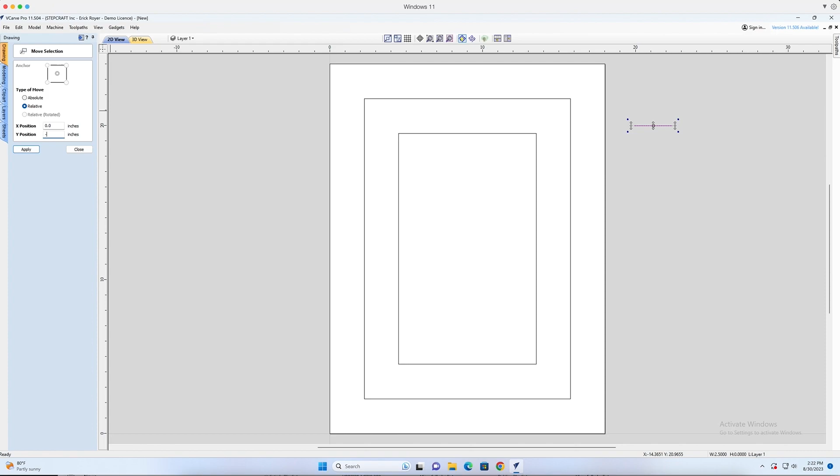I'm going to come here to Move Selected Objects and make sure I'm on Relative. And we're going to move the second line down, so negative 0.325, which is the depth of this pocket.

So I'm going to zoom in here. If you're looking at this, this is kind of like the top surface area of the door, and this is the bottom area of the pocket. So it's like you're looking at it from the edge.

We need to know what angle V-bit you're going to be using. In this case, I'm going to be using a 110 degree V-bit. So I want to make sure that these 2 snapping buttons are selected in Vectric. And I'm going to select the line tool, and it'll snap automatically to the edge of this top line. So all I want to do is click the mouse button once, and then I want to come over here to angle. Now I'm using a 110 degree V-bit, which if you divide that in half is 55 degrees.

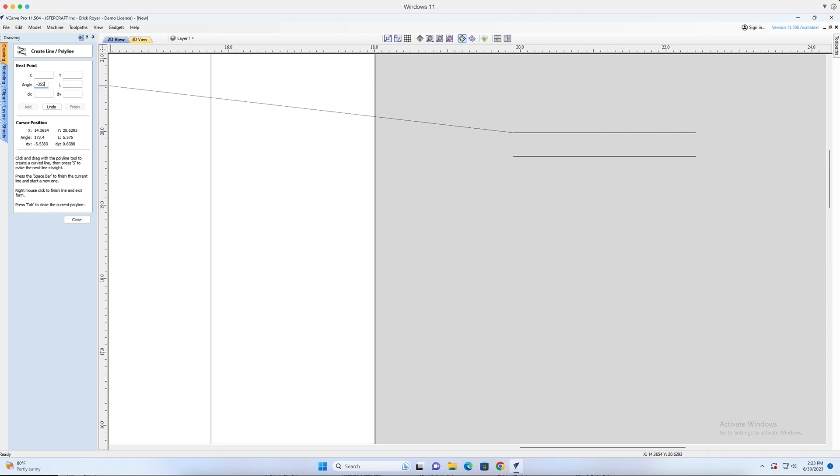Subtract that from 90, and that gives you 35 degrees. Make sure we have a negative sign so the angled line goes in this direction, so we'll do an angle of negative 35 degrees and give it a length of 0.75, then click enter.

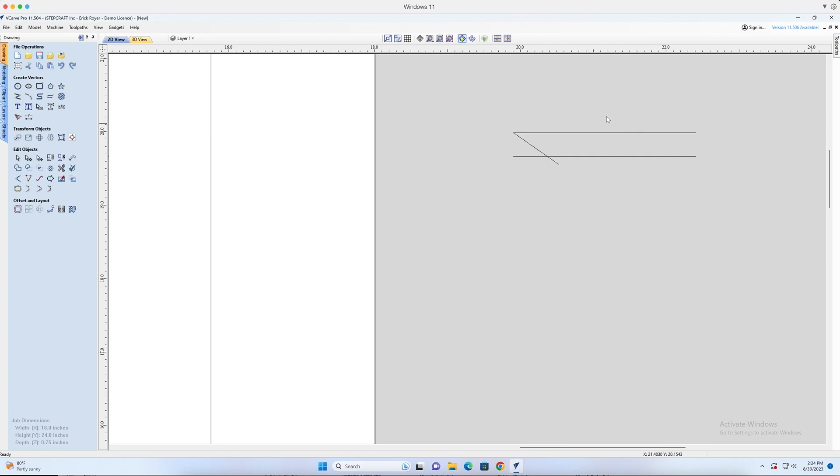Here's my line. I can click close. This represents the profile of the beveled edge on both sides of the raised panel section of the door.

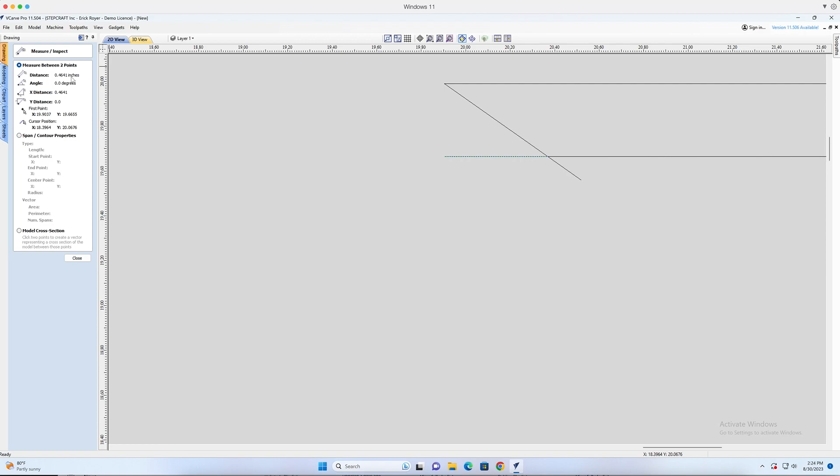But what I need is the dimension, so I'm going to click the dimension tool, the measuring tool. I need the distance from this point on the end of the line to this point on the intersection where the two lines cross, and I get a distance of 0.4641. You'll want to write that down.

I'm going back to the main drawing. We'll select the innermost rectangle and go to offset and layout again, except this time outwards, and we'll change that to the 0.4641 dimension we just measured. Make sure the top and bottom check marks are there, and click offset.

One final vector we need to create: we'll keep everything the same outward, but change this to 0.5 inches and create one more vector. I'll explain what all these are in a few minutes.

Next we select the innermost rectangle and Control C to copy it, then hit the letter N for node editing. You'll see four black squares appear in the corners. We hover over each square and hit C, cutting this rectangle apart into four separate vectors, four separate straight lines.

If I hit escape, I go back to a normal arrow, and you can see each of these is now a separate line. I'll select the bottom line, hold shift, select the top line, and go to Transform Objects, Set Selected Object Size. Make sure the center is selected for anchoring, and make sure link XY is not checked.

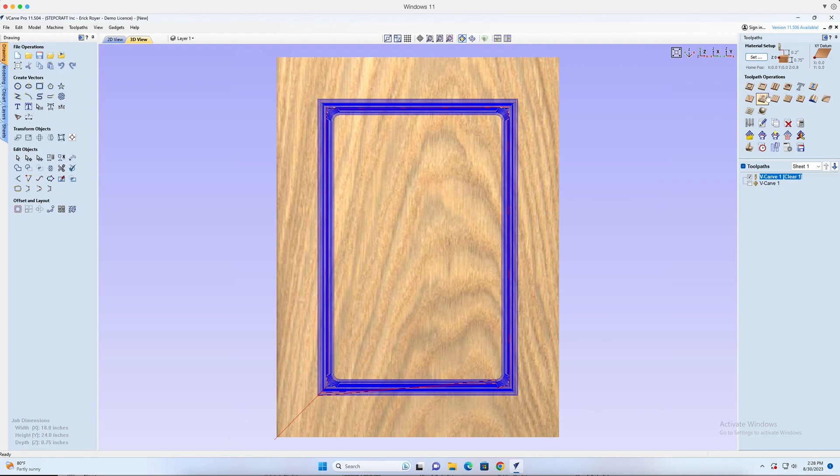So the first toolpath is going to be a pocket. I'm going to go preview that toolpath, and you're going to see it created a pocket down to 0.325 and then 2 steps on either side. Basically what this is doing is removing the bulk of the material so that the V-Carve bit does not have to do as much work.

Then we're going to select the V-Carve and preview that toolpath. Now you can see what happened here. It created a bevel on the inside, but I'm not concerned about that because we're going to create the final one in a minute.

What's more important is it created the bevel on the outside. If you look at the bevel, you get this nice sharp angled corner that goes all the way to a point right here. You can't get that if you're using a ball nose and doing a carving toolpath for MDF raised panel doors, because your bit is round. You'll never get a perfectly sharp corner. The only way to do it in this situation is with a V-bit and using a V-carve toolpath.

All right, so that's the first step. Now the next thing we're going to do is go back to 2D view, and we want to create a profile toolpath. We're going to select the same 110 degree bit that we had for the first one. Our cut depth is going to also be 0.325. We want to cut outside the line, outside the vector.

Now what we need to do is select the 4 lines that are in the middle, so that we extended the length of before. So 1, 2, 3, and then we'll select this one. And we're going to click calculate. It's going to give you a warning, basically just saying you're not using a closed vector, you're doing lines. Just click OK.

Now, looking at this from the top, what we want to see is each of these 4 lines should be right on the edge of this top raised panel rectangle. And it'll look just like this. But these 3 are not on the edge, they're moved in.

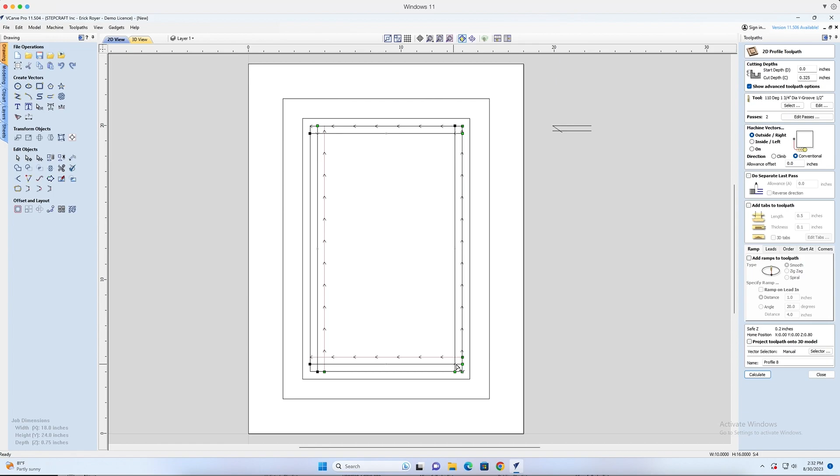Okay, and now we're looking at it and we still have an error, and I'm not sure what we did here. Oh, I think I know. I didn't select the actual vector, I selected the toolpath. So what we're going to do is on this one, we're going to hit P, and the other one was the bottom one. So this line right here, we're going to hit P and then calculate. And now we've got it.

So now all 4 lines are on the edge of that rectangle, okay?

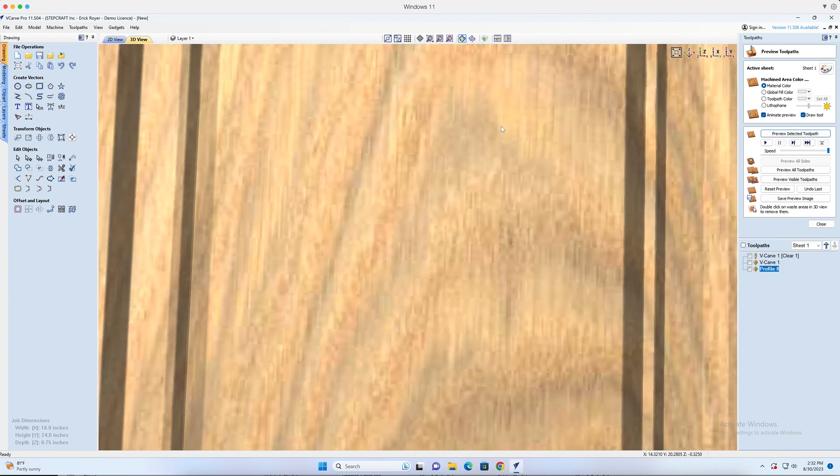So we can preview that toolpath now, and you'll see what it did. It created the bevel all the way around the raised panel, and just like on the outside, we've got a nice sharp angle on the inside here, and that looks good.

Now the only thing we got to deal with is this piece of material in the middle. It looks like a pyramid. That's got to be removed, okay? That's just what was left over from this toolpath and this toolpath, so we're gonna get rid of that.

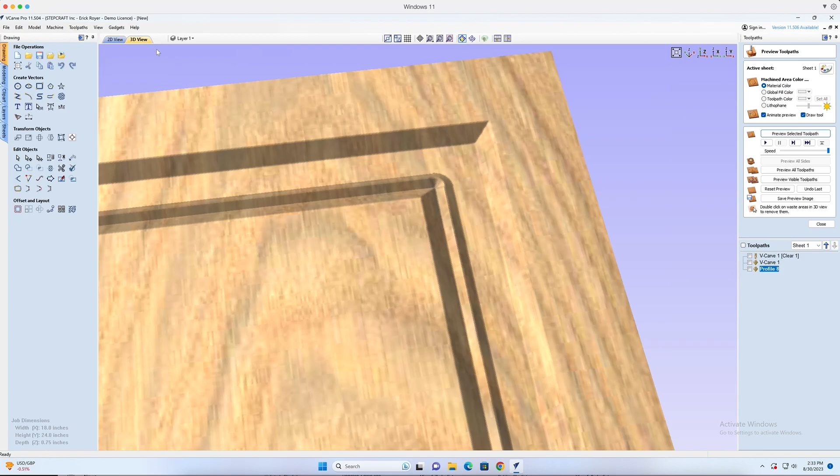The easiest way to do that is to go to a pocket toolpath. We're gonna select a 1/4 inch down cut with a cut depth of 0.325. Again, everything is based on the depth of that pocket.

Now what we need to do is select this vector, which is the one that we moved out from this dimension over here. Hold the shift key and select this one, which is the one we moved a 1/2 inch away from the previous, and we're gonna do pocket toolpath. 0.325, and click calculate.

Now we're just gonna preview that, and you'll notice that entire extra material that was left over disappears. What you're left with is a very nice raised panel door with sharp corners on the inside and the outside, and a nice clean flat bottom on it.

Now, the only other thing you might want to do to this is maybe put some sort of a chamfer or radius around the outside edge. You can do that with a radius tool and a profile bit. For this purpose, let's just do a chamfer. We'll use the 110-degree V-bit.

We're just going to go down 1/8 of an inch, and click that outside most vector, making sure we are on the line. Click calculate, and if I click preview, you'll see it put a nice chamfer all the way around the edge of the door. And there you have it - you have a finished door panel.

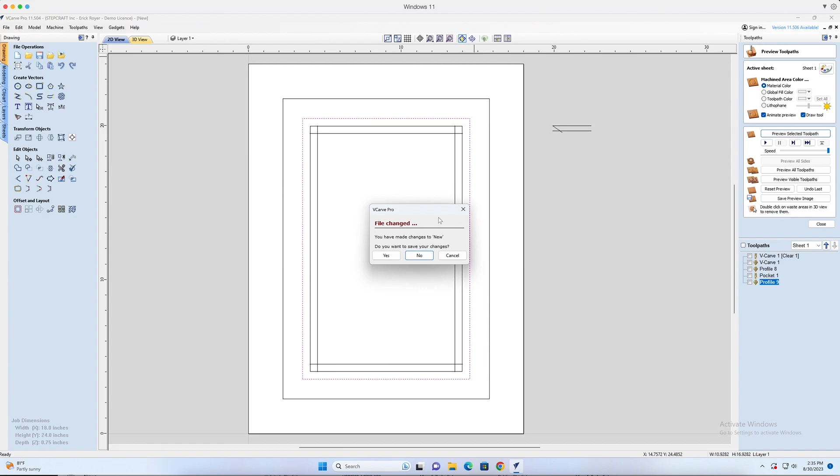So what we're going to do is create a new file, and use some different dimensions here. I'm not going to save that. Let's make the new one 16 by 25 - that's the door size we're using here. Click OK, so we're going to click the first vector.

I'm going to move a little faster on this one, 16 by 25. Now I have my vector there. We're going to offset it. Our first offset this time will be 2 inches inward, so that's going to be the flat spot on the outside of the door. I'm going to leave it 2 inches. Our second vector is going to be 2.5 inches. Click offset. All right, so there's the vectors that we have.

Now, we got to do the same thing with the line. So we're going to draw a line, copy that line and then paste it. We're going to come over here and move that line relatively. This time, instead of 0.325 pocket depth, let's go 1/2 inch - minus 0.5, hit apply.

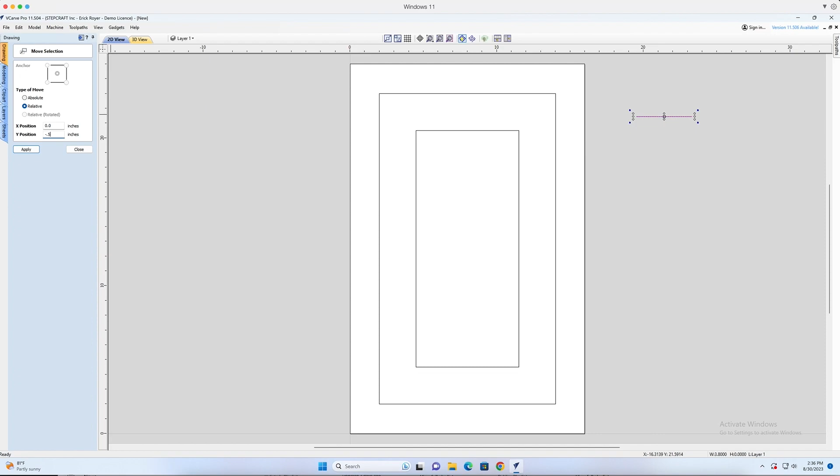Now, we're going to zoom in here to take a look at this. So this is the top surface of our door, this is the bottom of that pocket. It's a 1/2 inch. We're going to click the line tool, we're going to do the same thing.

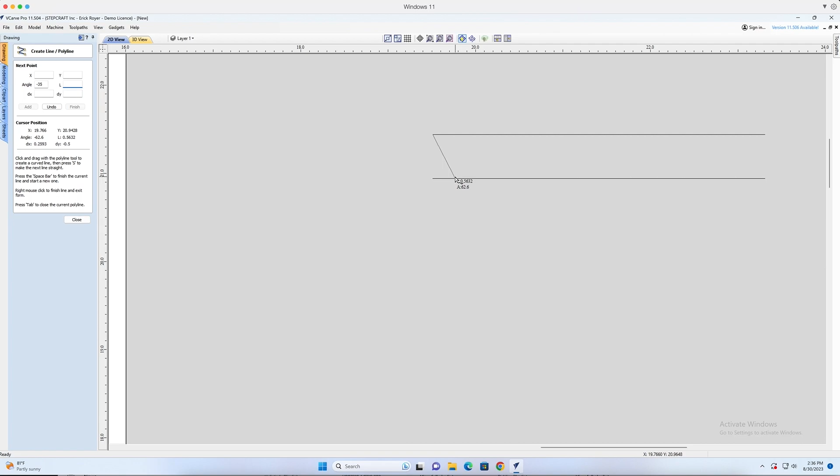We're going to click on this corner to start a line, then come over here. I'm using the same 110-degree V-bit, so I'm still going to do minus 35. This time, because if I did 0.75 here, you'll see it doesn't quite make it down to the bottom line, so we'll just put 1 inch. And now you see that we've gone right past it, which is good.

So we're going to go to the measure tool. We're going to measure from this outside point to the intersection again.

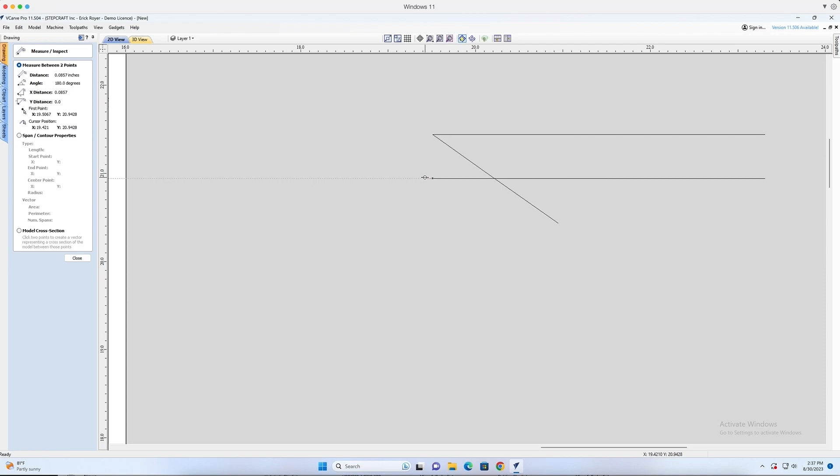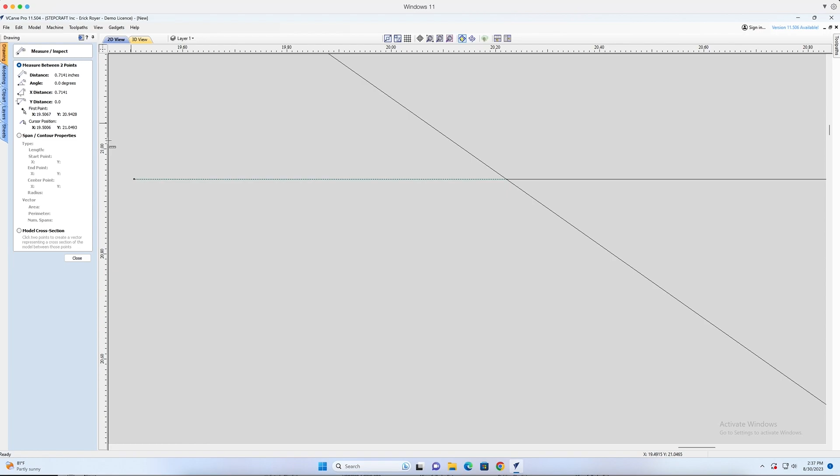Let's do this one more time, I want to make sure I'm accurate on that. So from here to this intersection is 0.7141 inches. Okay, so we're going to write that number down. We're going to need that.

We're going to select this vector, Control C to copy it so that it's in memory, then go over to offset. We're going to offset outward 0.7141 inches, click offset. Now we'll do another offset at 0.5 inches like we did on the first door, and I'll show you what that does and how to fix it if you see this happen. So we'll click offset again. Now we're 0.7141 and then 0.5.

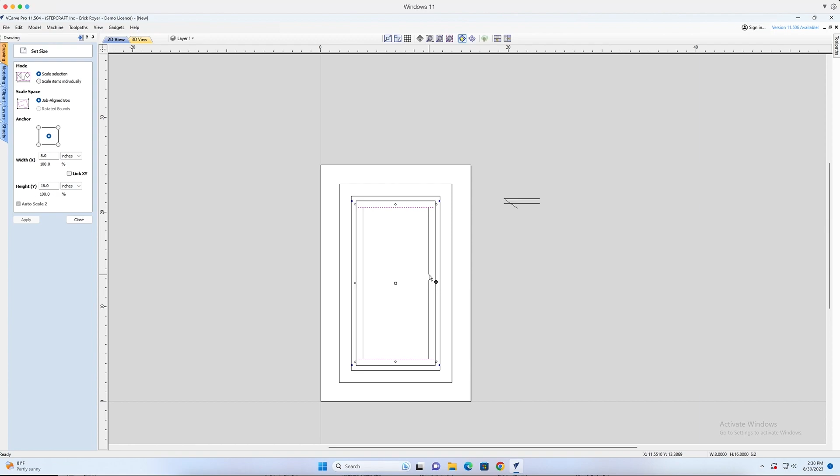Now we're going to go over and select the inner rectangle and hit N for node editing again. We're going to do the same thing, hit the letter C, and cut each of the 4 corners, so we have 4 individual lines. We'll hit escape to get the arrow key, select the top and bottom lines, go over to set selected object size, add 1 inch to this so it's 8, click apply, select the left and right, and add 1 inch to go to 17, click apply.

So now I have all my vectors. The only thing I need to do is remember to hit Control V to paste back in that rectangle that was in the middle, okay?

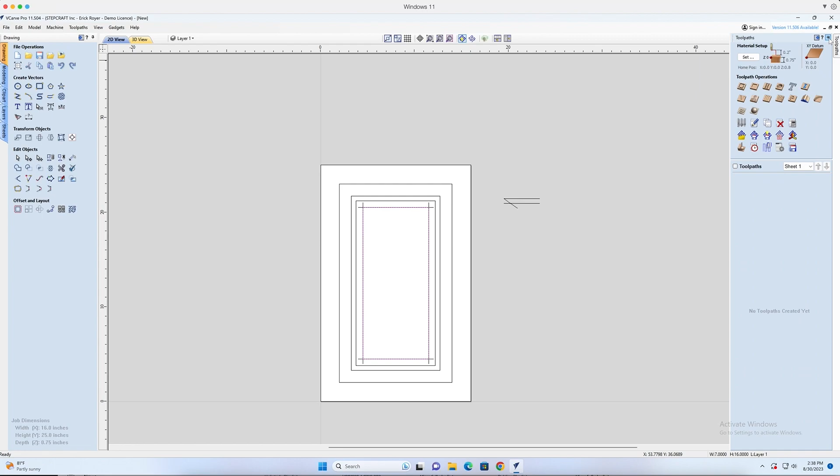Now I'm going to show you, this is not going to come out perfect, and I'm going to show you because I want you to understand how to correct it if this does happen to you, depending on the size that you're doing. So we're going to do the same toolpath.

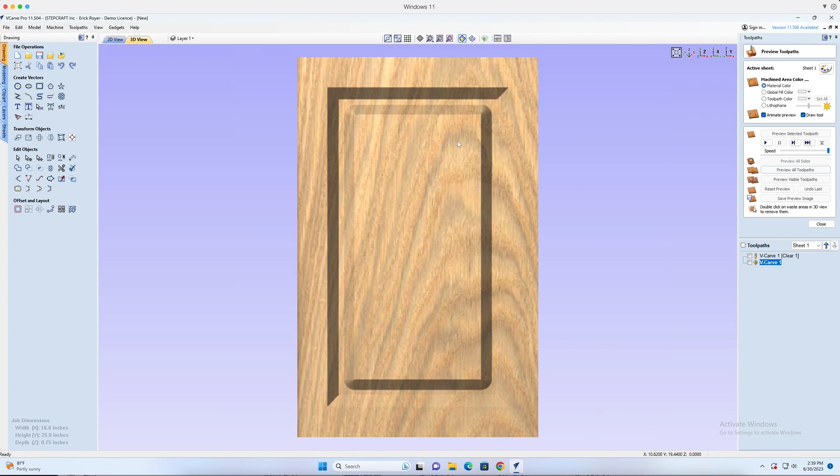So we're going to go V-carving toolpath. We're going to do 0.5 inches this time for a flat depth, same end mill, same 1/4 inch clearance tool, and we're going to select this vector here and this one, the one that we moved in 0.7141. Click calculate, and we're going to preview those.

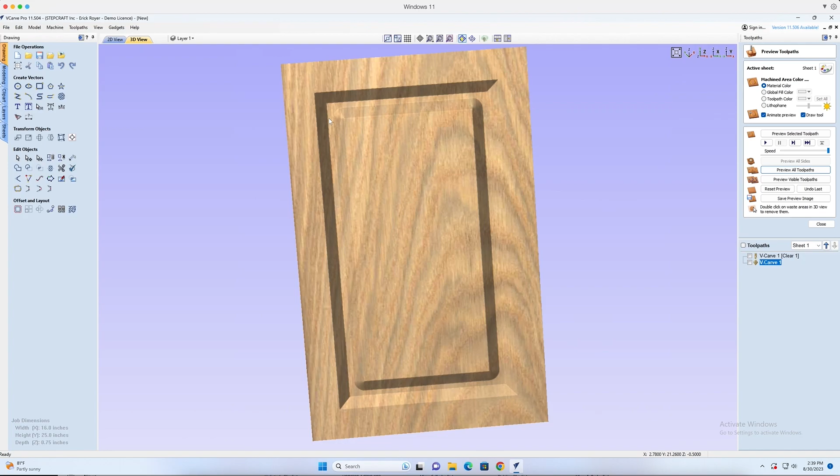And you can see I've got a nice clean outside bevel all the way around. Looks good. Now, the reason we do the second toolpath for the V, where we do the profile with those lines that are chopped up, is see what happens when you V-carve the inside of a rectangle: it rounds out the corner, and that's not what we want. We want a square corner. So by creating 4 separate lines and profiling each one individually, it creates a V line in each direction, and then when they crisscross in the corner, you get a nice sharp bevel, okay?

So the next thing we're going to do is go to profile toolpath. We're going to select, we have the 110 degree, we're going to go down 0.5 inches on this one again. We're going to go outside the line and then select these 4 inner lines, and we're going to click calculate.

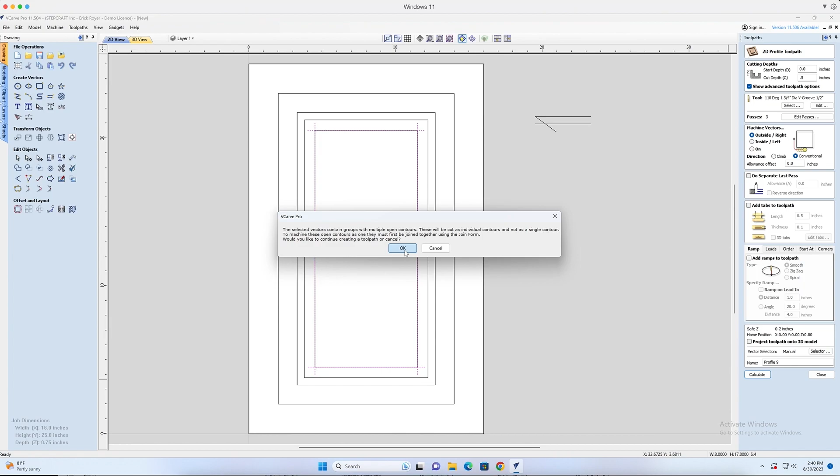Same thing is going to happen. We want to make sure all 4 of these lines are on the outside edge of this rectangle. So these 3 are not, so we have to correct that. We're going to hit the letter N for node editing, and we need to move the start point to the opposite end. So we're going to hit the letter P here, here, and here. No.

Let's see, did I do this wrong? Let's see here. Okay, now we'll just recalculate this and see if I messed it up or not. Yep, I messed up the bottom. So we'll go back in and fix that. We're going to click N again, and we're going to do P.

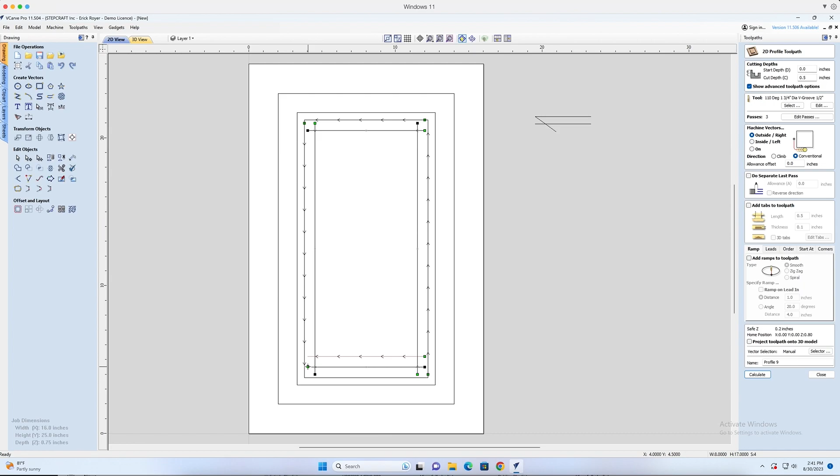There you go, now all 4 are on that edge. Everything looks good. We're going to go ahead and preview the selected toolpath. And I can already see there's going to be a problem in the corners, but we won't address it yet.

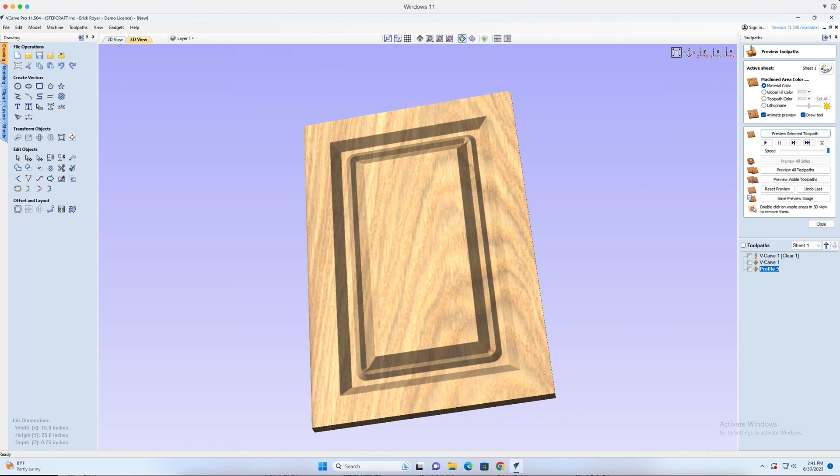We're going to go ahead and remove this material now. So we'll select this vector and this vector, and we're going to do a pocket toolpath. We're going to go down 0.5 inches and click calculate. Then we'll preview the selected toolpath.

Okay, so there's a couple problems that happened here, and this is where I said you may have to vary the dimensions that you use. First of all, on this pocket toolpath, it did not remove all of the material, and that's because we're going deeper now, so the angles change. All we needed to do is move that vector out, from a half inch we should have moved it out probably 3/4 of an inch, and I think it would be better.

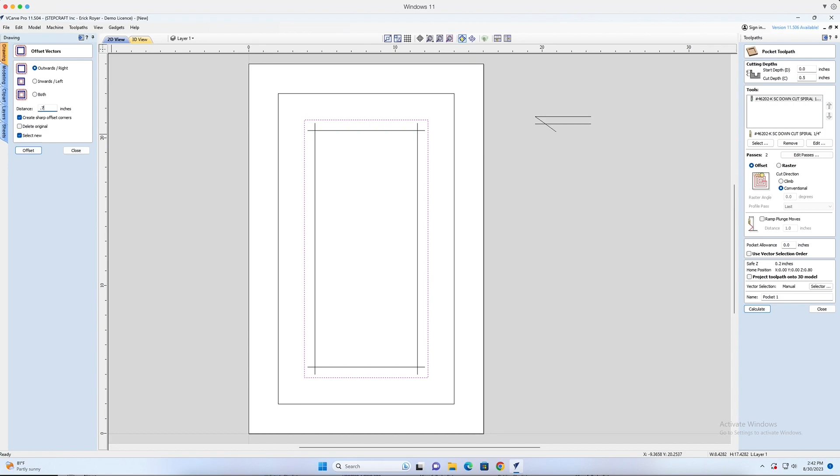So what we'll do to fix that is select this vector and delete it. We'll go back to this one and offset outwards, but instead of 0.5, let's do 0.75, and click offset. Then we'll select the inner vector, so these two are selected, and click calculate. Now when we run that toolpath, you can see it's nice and clean, got rid of everything.

But now the other problem is in the corners. See how there's this little nub here on each corner? That's there because the lines that we're running the V-bit on need to be longer, and the V-bit just stopped just shy of the edge, and that's what's causing that.

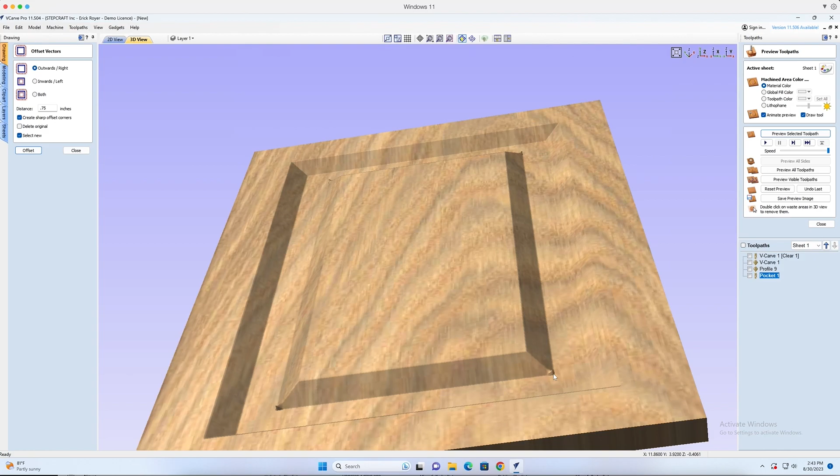So to fix that problem, all we need to do is the same thing we did before. We'll go back and select the top and bottom vectors, so we're going to select this line and this line. Now the reason I'm clicking out here is if I click in the middle, it's going to select that rectangle that was living in there. We only need the lines.

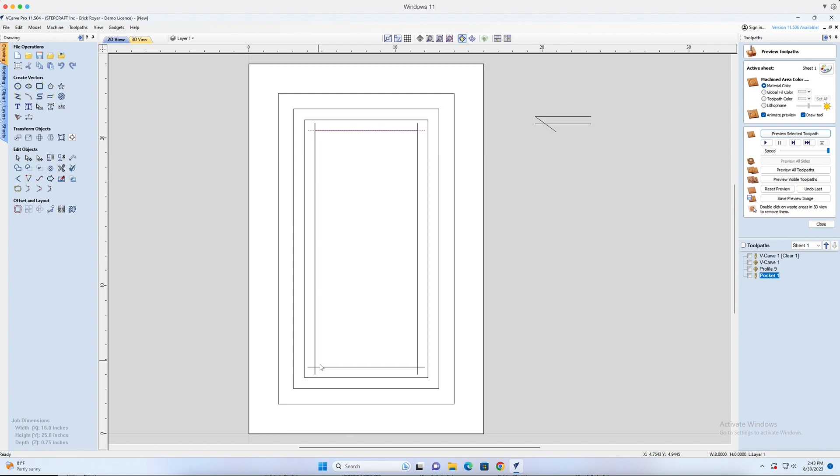So if I select that, hold shift, go to change object size. Instead of 8 inches, let's make that 8.5 inches. So instead of making it 1 inch bigger, we're going to go 1.5 inches bigger. Click apply, and then we'll select this one and this one, and instead of 17, we're going to go 17.5. So on each of these lines, we're making them 1.5 inches longer than they were previously, instead of 1 inch.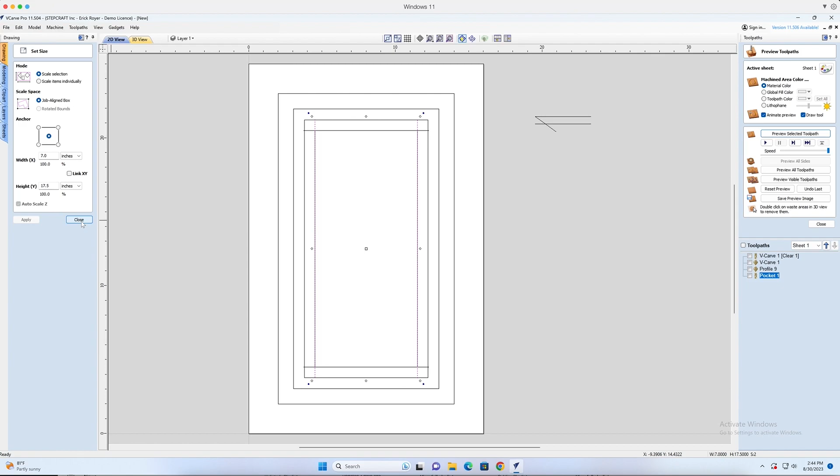Okay, so we'll go to the profile toolpath again, it already has those 4 lines selected. Click calculate. And now you'll see when we preview that toolpath, the corners are perfect, that nub goes away. So you just extended the line where that V-bit was going.

And now you can see we have a really cool raised panel door. The pocket depth is 1/2 inch now instead of 0.325. Same bevels on each side, and we changed the width of this part and this part of the door.

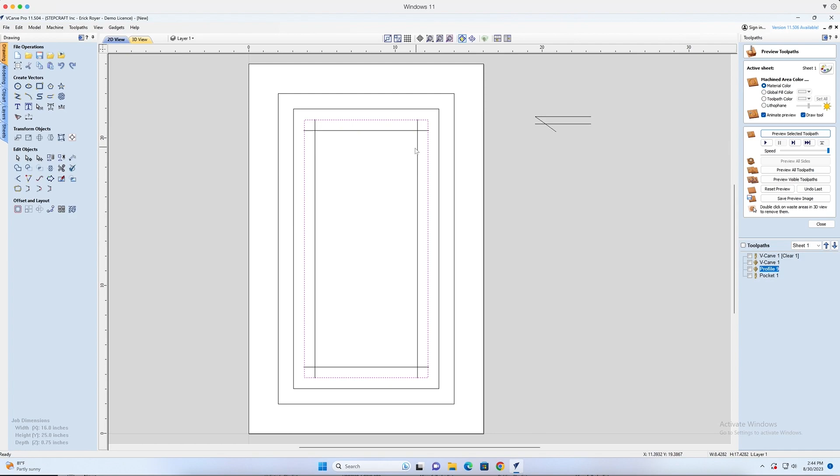So as you see, no matter what you do, whether you go with a 90-degree V-bit or something like a 120, you may have to adjust some of those vectors. But the key here is making sure that this vector right here is offset from the raised panel vector by whatever you find out doing this angle here. That's critical because you want to make sure that pocket comes in right at the bottom where this intersects the flat part. Otherwise you'll have a weird line, or if you don't go far enough, you'll chop into this angle and it won't look right.

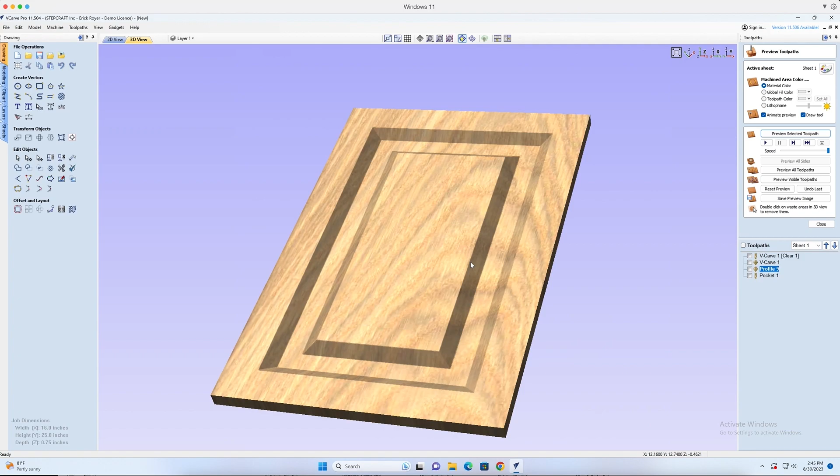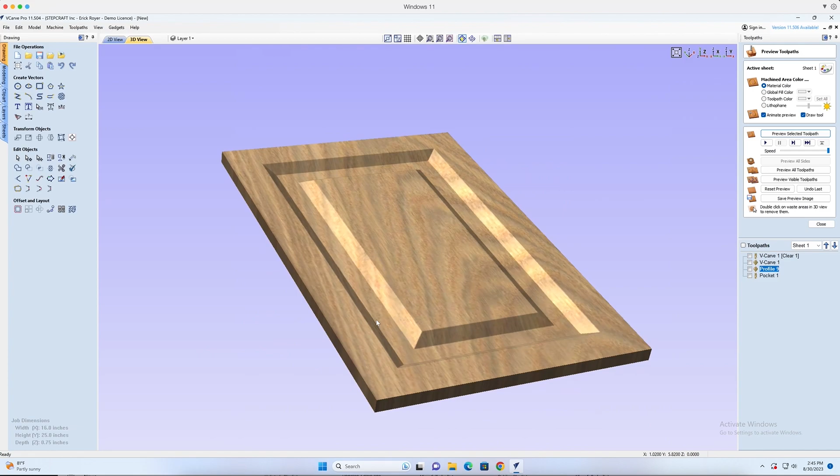So that's basically how you can do a very simple toolpath for a raised panel door on your CNC machine using V-Carve. You don't even need Aspire or V-Carve Pro, this could be done with desktop as well.

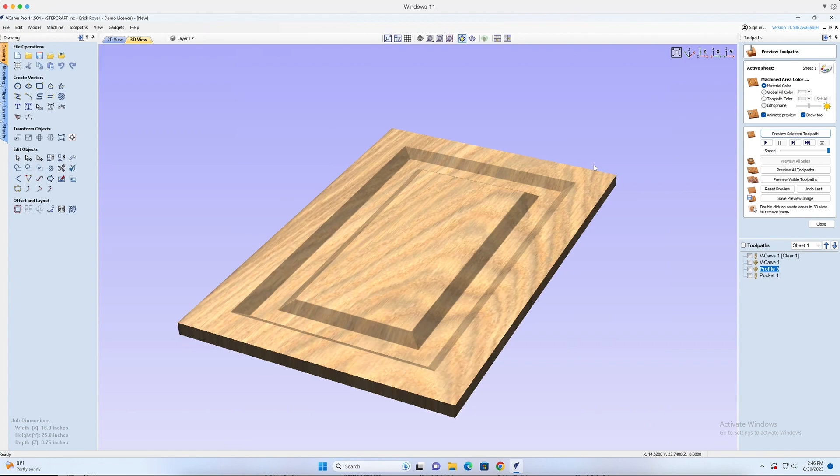And as you can see, really cool looking, and you don't need any real special tooling, just a standard V-bit upcut and a V-bit downcut. And if you're doing a profile on this door, I would recommend using a compression end mill most likely. You could use a downcut as well around the profile, but to get a better top and bottom finish, compression is usually a really good bit to use for that.